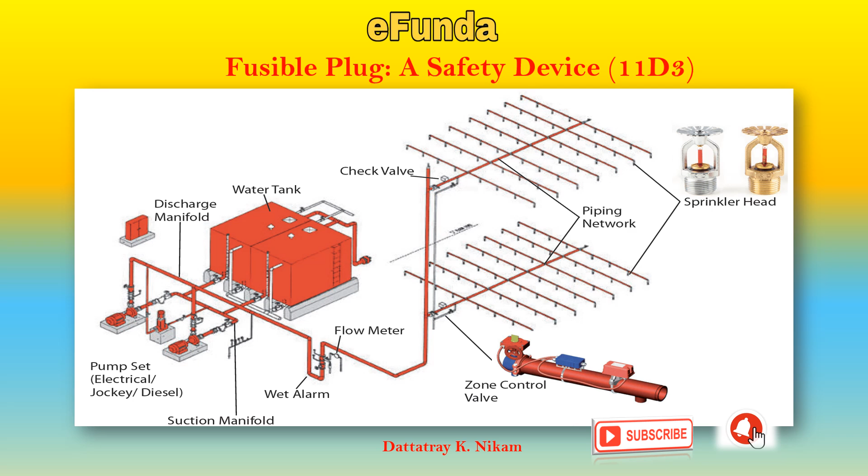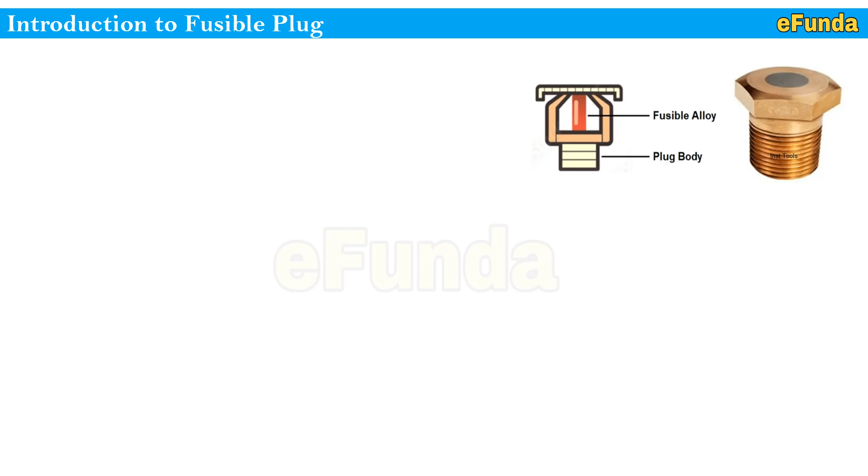So let's begin with our today's topic, that is a fusible plug, a safety device, part 11D3. Introduction to fusible plug. One can refer to the picture where one can see the fusible alloy, plug body and fusible plug. It can be defined as: a fusible plug is a safety device used in a pressure vessel such as a steam boiler or pressure tanks, designed to prevent catastrophic failure due to excessive pressure or temperature.

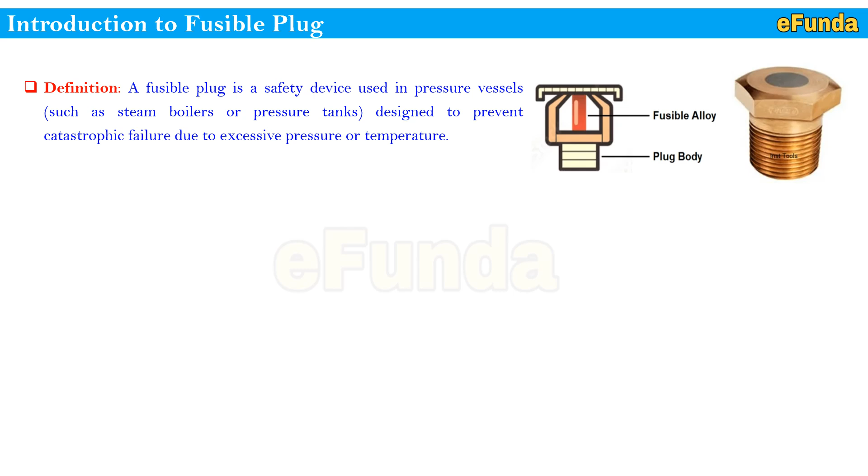Working: a fusible plug contains a material that melts at a specific temperature, typically lead-based alloys. Once the temperature exceeds a set limit, the material inside the plug melts, allowing the gas or steam to escape and relieve the pressure from inside.

Structure: it consists of a metal body with a hollow core filled with a fusible alloy. Second, it is fitted in the pressure vessel in a way that it can act as a vent whenever it is needed. This is the typical structure. We will see more details about this. As mentioned, it is based on the temperature. If it exceeds the limit, it will melt down. We will see that detail as well in this video.

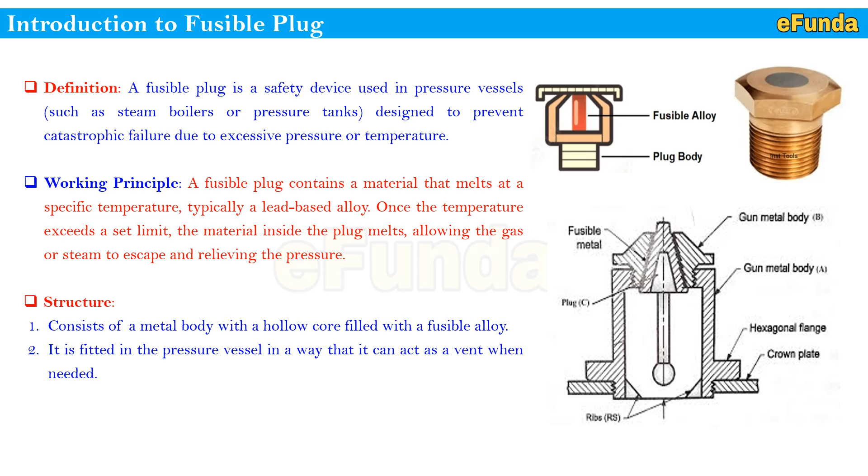Construction of a fusible plug. A fusible plug is a safety device commonly used in pressure vessels, boilers, steam engines to prevent a dangerous overpressure situation. It is designed to melt and release pressure when the temperature or pressure inside a vessel becomes too high. Here some of the introductory components we will see and study.

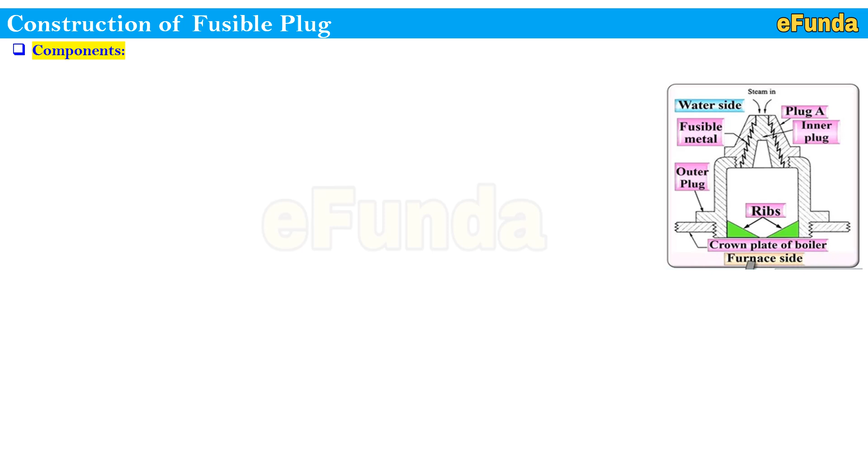First is the component part. One can refer to the picture where one can see the fusible plug construction, and we'll see the components inside it. Material: the fusible plug is typically made of a metal or alloy that has a low melting point. Common materials include lead or alloys such as tin and bismuth.

Second, structure: the plug is installed in a fitting on a vessel and often features a very small cavity that holds the fusible material in place, as one can see in the picture where the details of each component are mentioned, which we have seen in a previous slide. The cross-sectional view is provided for a better understanding of how the functions inside are done.

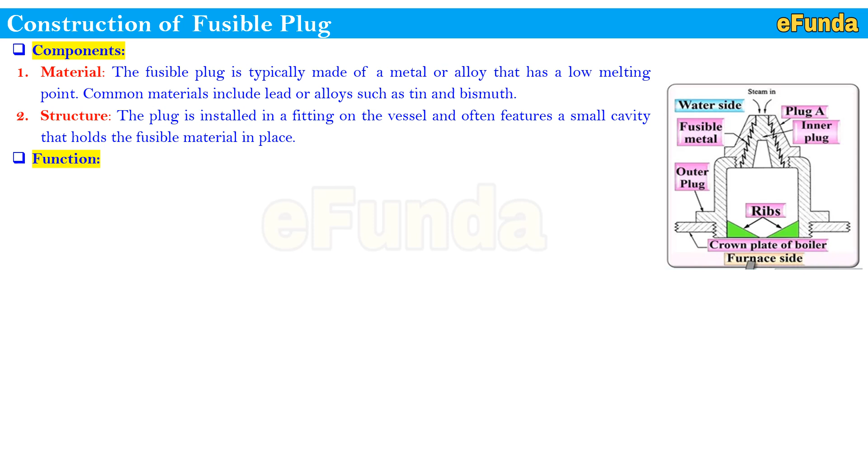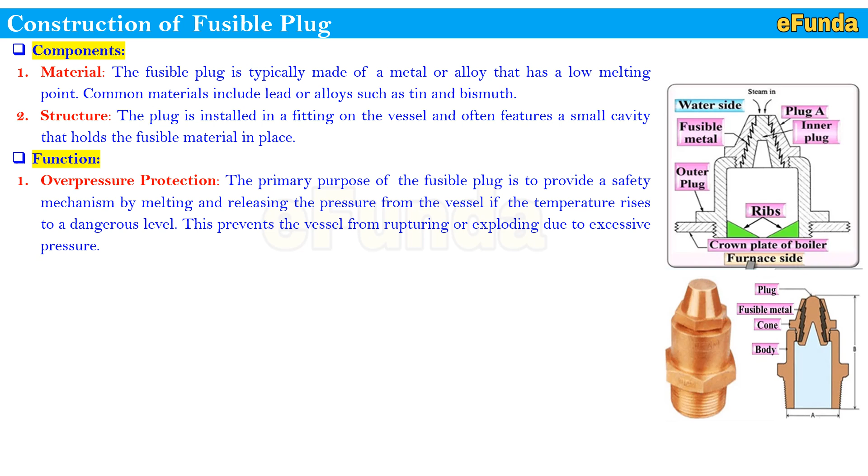Now moving on to the function. Before that, one can refer to the parts of a fusible plug and the actual fusible plug assembly in the second picture, where plug, fusible material, cone and body are shown. The functions of the fusible plug are: first, overpressure protection. The primary purpose of the fusible plug is to provide a safety mechanism by melting and releasing the pressure from the vessel if the temperature rises to a dangerous level. This prevents the vessel from rupturing or exploding due to the excessive pressure.

Second, temperature sensitive. The fusible material is designed to melt at a specific temperature, usually much lower than the metal of the vessel itself. This allows the pressure to be safely vented before catastrophic failure occurs.

Last one is the operation. Under normal operating conditions, the fusible plug remains intact and the vessel operates under controlled pressure. If the temperature increases due to overheating, such as from fire or any malfunction in a mechanical component, then the fusible material will melt, creating a hole or passage through the plug assembly. Third, this allows the pressure inside the vessel to be safely released, preventing a rupture or explosion. This is the purpose inside the vessel. They use the fusible plug to depressurize whatever additional overpressure has to be relieved.

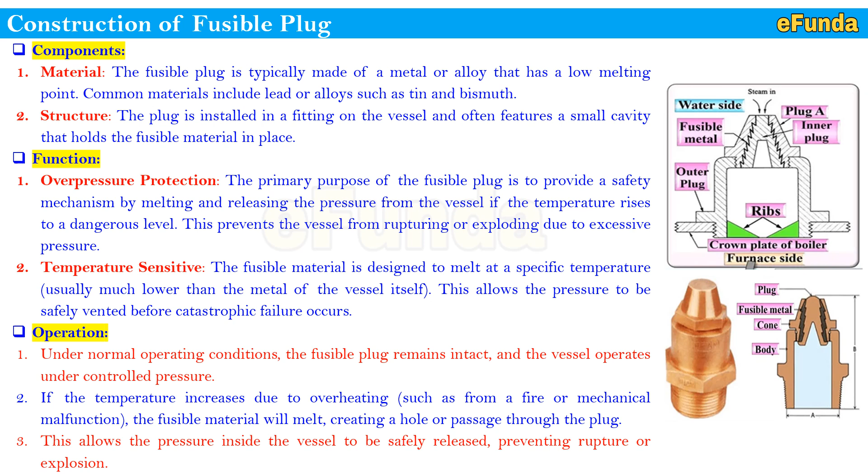Another application of this is in fire water systems, where the water is placed inside the structure, and upon melting of the plug, the water will sprinkle over the area where the fusible plugs are installed to help with the fire, so the area can be sprinkled with fire water to avoid the spreading of the fire, and one can control the fire. This is the construction of a fusible plug.

It is very important to understand the requirement of a fusible plug, for which we have created a datasheet for fusible plug. Quantity: 144 numbers. Based on the layout modification requirement, these quantities were added. Service: fire detection. Fluid: instrument gas. Plug material: fusible alloy. Body material: SS316. Melting temperature in degrees Celsius

is 85 degrees Celsius. Maximum ambient temperature is 40 degrees Celsius. Pressure, operating and max, in kg per centimeter G: 3.5 to 10.5. Pressure rating: vendor will specify. Connection: 3/8 NPTM. NACE: yes, NACE required as per MR0175 latest edition. Vendor will specify the make and model for the offered fusible plug. This is how the requirement of a fusible plug is covered as part of the datasheet.

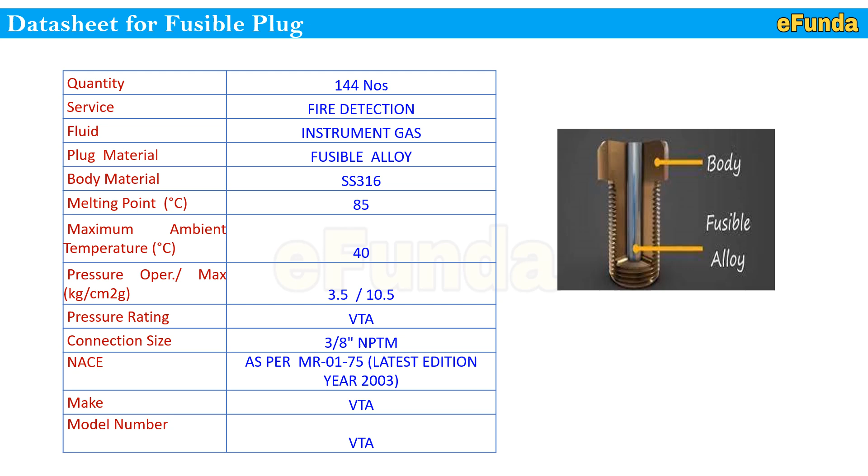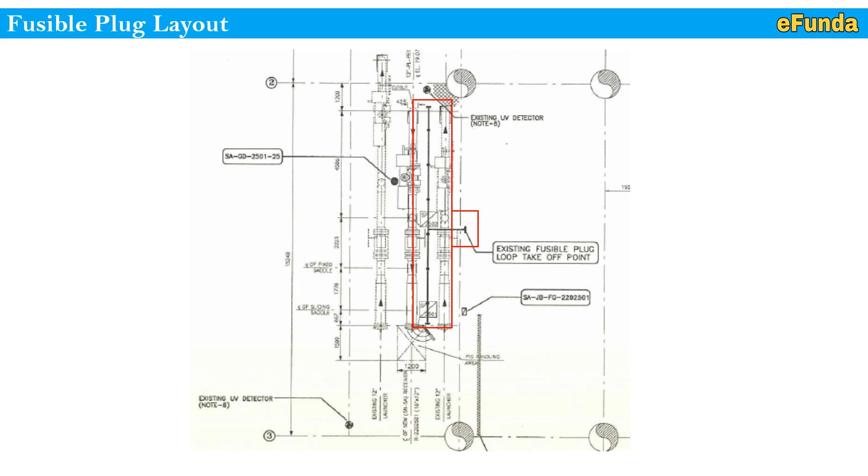Similarly, an additional detector is also added, and to continuously protect this system, the existing fusible plug loop is added along with a new installation of a fusible plug. This is how the typical fusible plug layouts are prepared for typical cases. Consider this as a study case from one of the project extracts, and this is for private circulation only.

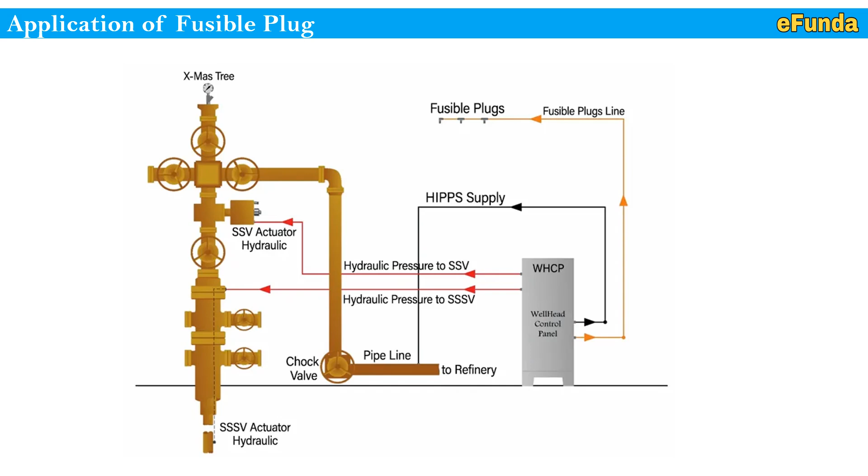This is how the fusible plug is used for various applications, and one of the applications is where the typical wellhead control or Christmas tree interface is shown. We have come to the place where we will learn the fusible plug applications. First, boilers. Fusible plugs are widely used in steam boilers to prevent overpressurization from causing accidents. Second, pressure vessels. They are also used in various industrial applications such as gas tanks, refrigeration systems, and fire protection systems.

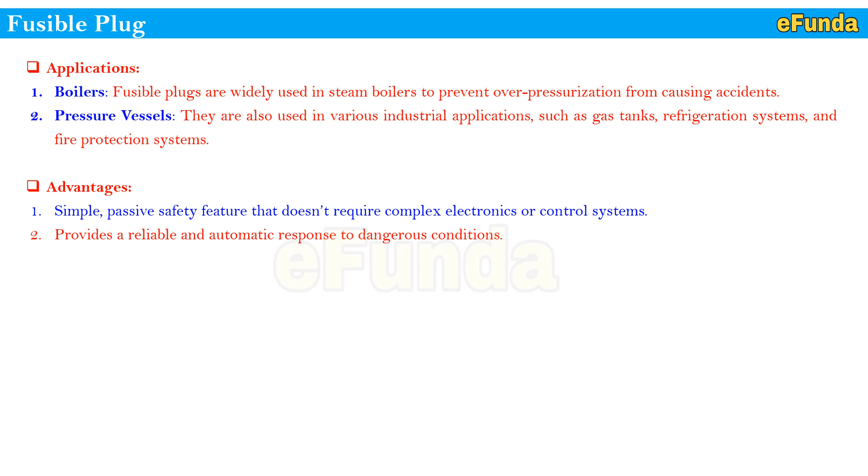Advantages. First, a simple passive safety feature that doesn't require complex electronics or a control system. Second, provides a reliable and automatic response to dangerous conditions. Third, can be used in conjunction with other safety devices for layered protection. Example: fire and gas detection system.

This system will have some limitations as well. First, fusible plugs may wear out or degrade over time, so regular inspection and maintenance are important. Second, they are only effective for specific temperature and pressure conditions. They don't protect against all possible hazards. In summary, fusible plugs are an essential component for ensuring the safety of high pressure systems by automatically releasing pressure in case of overheating, thus preventing catastrophic failure.

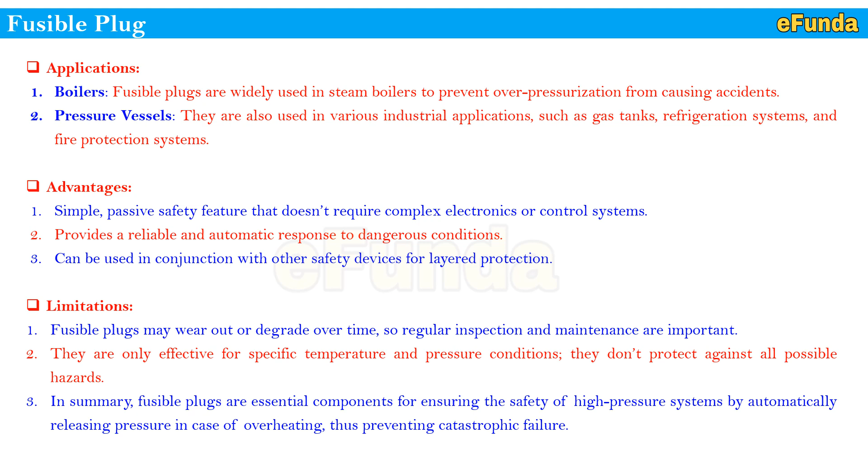This is how we have tried to cover the fusible plug, a safety device, for your better understanding, and hope this video will help you to understand the fusible plug in detail. With this, we are concluding today's topic.